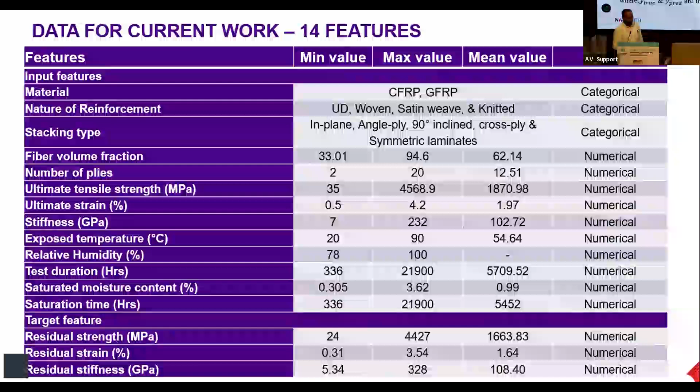R-squared, MAE or mean absolute error, median absolute error, and root mean square error are the general statistical terms we use to quantify the result or outcome of our machine learning model.

One thing we have to make sure is that the data we're using in a machine learning model should be present in at least 10%, more than 10%, of the rows of the data. Unless that happens, the machine learning model won't be able to capture the relationship between those important input features. Once we've decided what data we have and what we want our model to do, then comes the selection of model.

For selection of model: if it's structured data, we go with a machine learning model; but if you have images, sound, thermographic images, or resin flow images to learn about the quality of the composite, we can go for a deep learning model.

Unlike a conventional computer program, we don't need to write an ML model from scratch. Luckily, most of these models are easily available in the public domain, and you can download them from the internet and start working with the model itself. Choosing and training a model involves three steps: training, validation, and testing, and then comparing the models to see whether one worked better than another.

But remember one thing, no one model is perfect. Your step is to apply, use all the models, test all the models, and then come up with a solution that is working great for this particular kind of data.

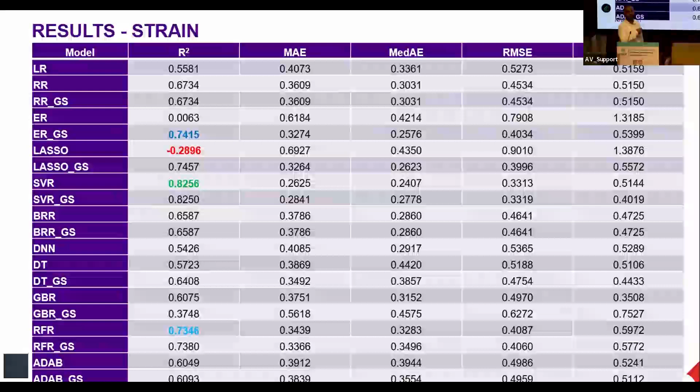Because we are trying to predict something and you will be preparing your own input data. So if new data is suddenly given to it, whether it will be able to generalize the learning it has attained over training. So this result can be associated.

So once hyper tuning is applied, different models tune their inputs and train themselves differently. Actually I'll share all these slides with Singh sir, and I have the manuscript also, which you can go through, and you will find that each model treats different input parameters differently. And they have a number of hyperparameters which need to be tuned in order to get the right result. These are the results from the best model, each model giving us the best output, right?

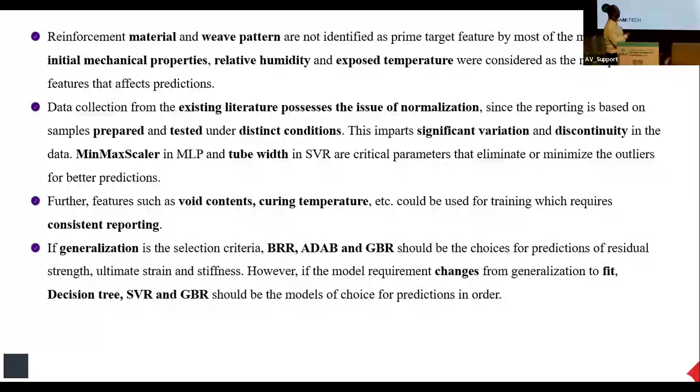But when the requirement changes from generalizability to fit, then decision tree, support vector regression, and GBR or gradient boost regression are the models that you should go for, provided you are fixing residual stiffness as the suitable predictor.

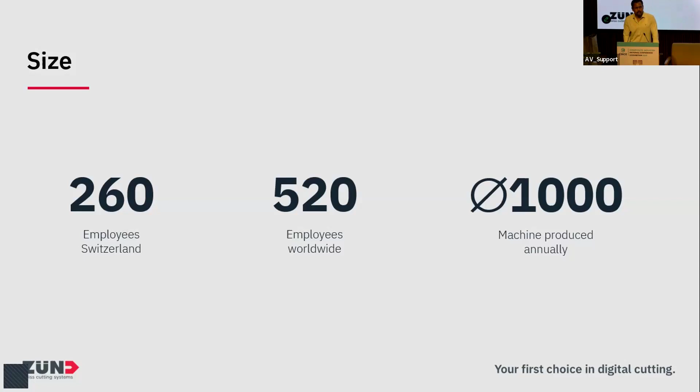In Switzerland, we are about 260 odd employees, but globally we are a little over 520 employees, producing about 1,000 odd machines. A little insight into our operations globally: we are 14 companies outside of Switzerland with an additional 60 sales partners. We have a little over 300 trained and certified technicians to handle our after-sales processes.

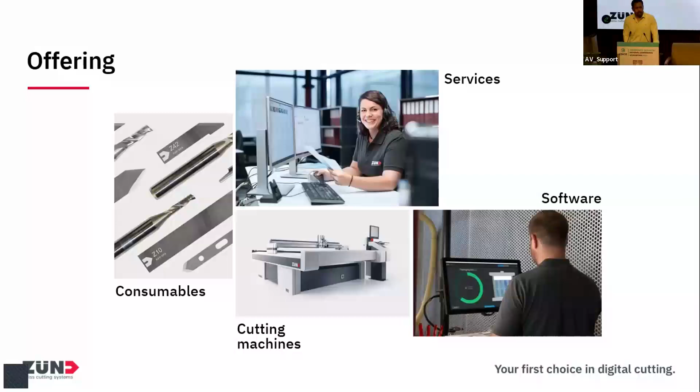So in addition to the cutting solution, the digital cutting machine itself, we also offer relevant software services, which go hand in hand with our hardware services. We also have our in-house spare parts and consumables support partners in Switzerland. And in addition to these, we also offer pre-sales and post-sale services. Over 15,000 customers globally, spread across 100 countries, and over 25,000 installations in various different industry segments.

Sustainability is the core of Zund. It even translates into our machinery. We talk about a machine life of, let's say, 15 to 20 years at least. So coming back to the composite market itself, what kind of solution do we offer to the composite market?

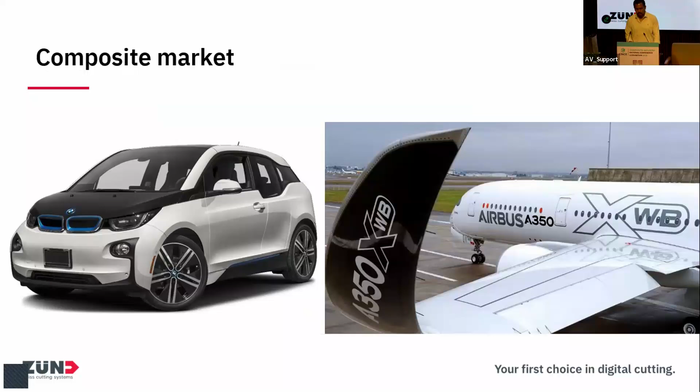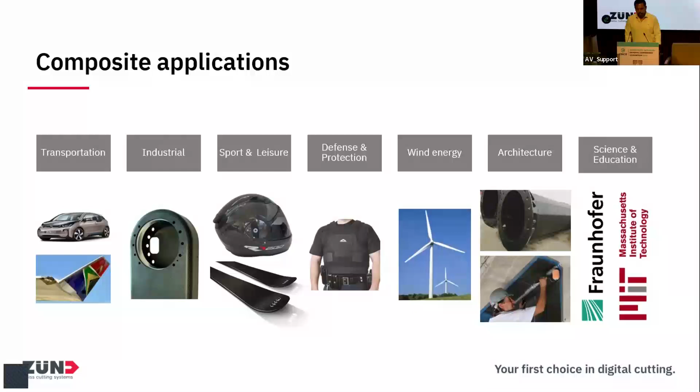So the composite market per se is diverse in its existence. It's not only focused on one particular segment. We have transportation, but the use of composites is not limited to that. We have industrial components being made. It's used in sports and leisure. Defense and protection also, for making bulletproof jackets and things like that. Wind energy is a big segment again. Architecture is catching up. Not so much in India, but I heard from the earlier presentations that it is slowly creeping in. Science and education, obviously.

So what are the substrates that we can actually apply our solutions to? It's not only limited to composite carbon or glass fiber fabrics, but also prepregs, unidirectional tapes, core materials which are used in aerospace and defense, even cured components of GFRP and CFRP, auxiliary materials for sure, thermoplastics, hard foams, and also sandwich materials.

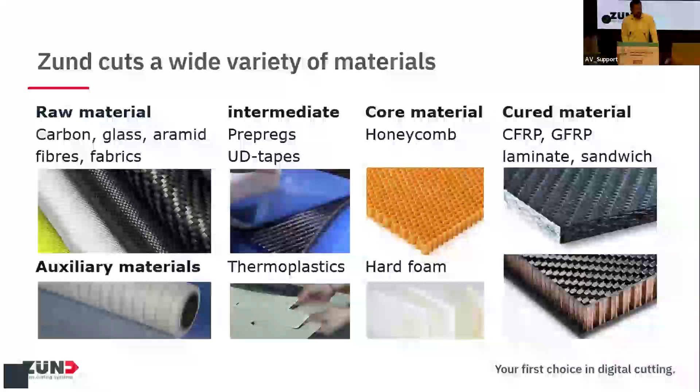We also have various workflows for handling the substrates, right from carbon, glass, and aramid fabrics. We can cut and mark prepregs as well, cutting and routing thermoplastics, cutting and routing core materials, routing of fiber reinforced plastics, and we can offer fully automated cutting, sorting and kitting solutions to the industry. Let me just quickly show you a small video so that you'll get more insights into this.

So that's the screen on the machine itself. The cut components are sourced from your AutoCAD or CATIA in the form of vector files, could be DXF, could be PDF. We have an elaborate material library. So in order to save material, we have a full-fledged nesting program, which we can offer along with the machine. A little bit of editing is also possible on the machine itself.

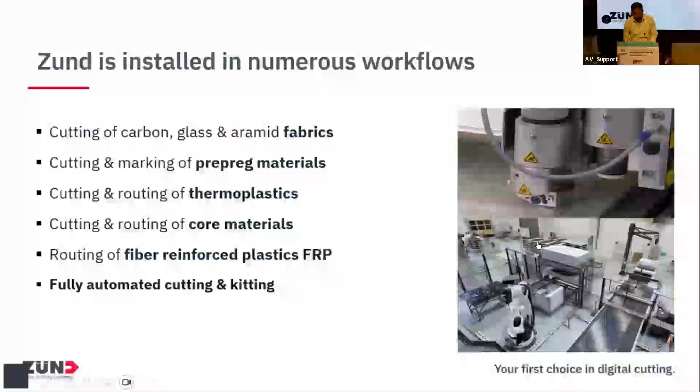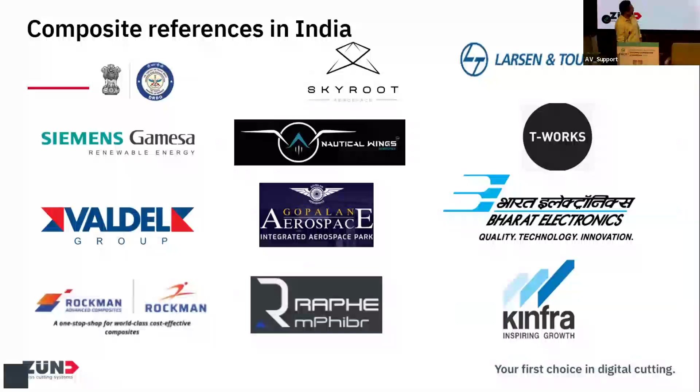That was a short presentation from Zund. We are here just outside this hall. If you have any questions or clarifications, I'm here today and tomorrow as well, so please visit us.

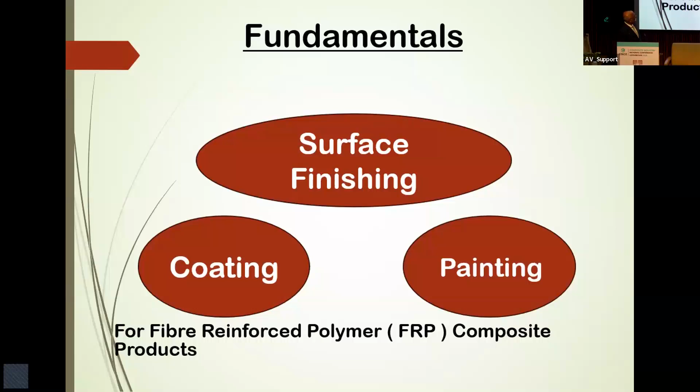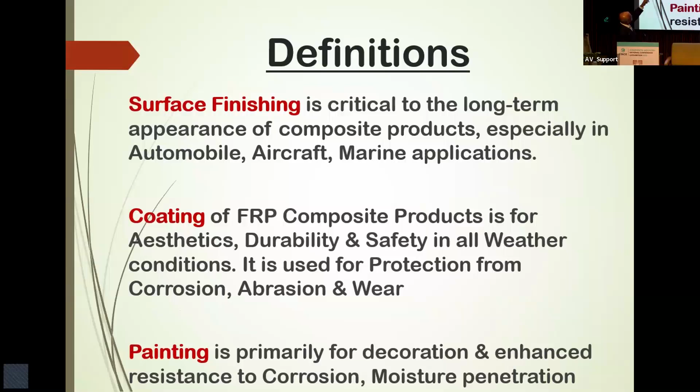Surface finishing is critical to the long-term appearance of composite products. Coating is also for aesthetics and durability, and painting is primarily for decoration and enhanced resistance. These are all post-operation processes.

There is a misnomer in this industry. We call FRP fiber reinforced plastics, which is a wrong word. Plastics is a wrong word to use for FRP; it is fiber reinforced polymers. When you say plastics, the general public, if you take an auto in Ahmedabad and see the mudguard cracked, and ask the driver what happened, he will say 'fiber is up.' Fiber is a misnomer. We are into fiber reinforced polymers, and it has to have a good finish. Quality surface finish is not optional, it is compulsory if you want to be in the market for the long term.

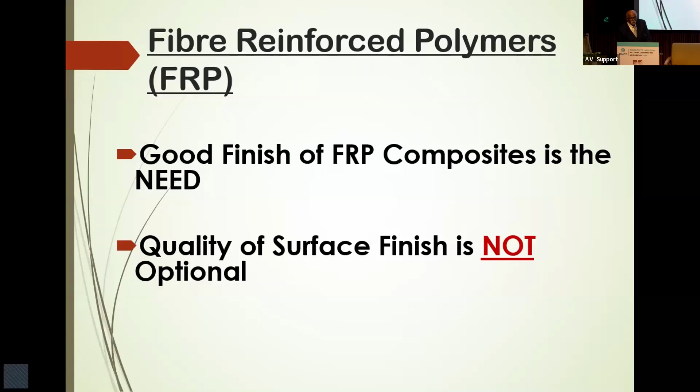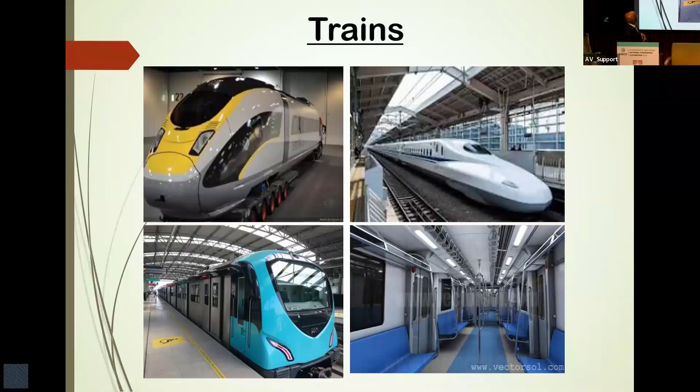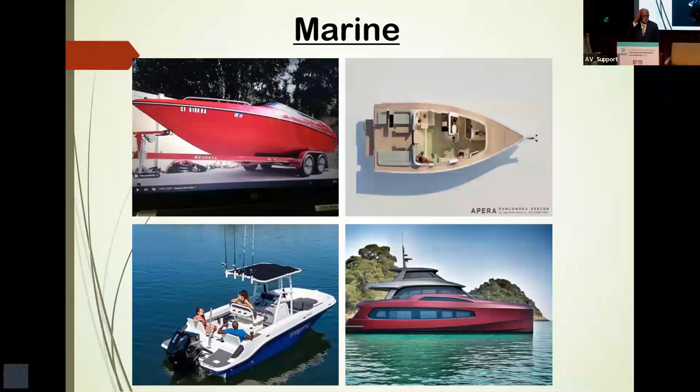Marine applications. In our industry, we say class A finish. Class A finish means it is like a mirror. If you look at this boat, a man with good hair can comb his hair looking at it. That is what is called class A finish. See, that is also a class A finish, but it is matte finish. The importance of finish here is when the boat is gliding through water, it has to have no resistance. It has to go smoothly, so finishing is very important in this application.

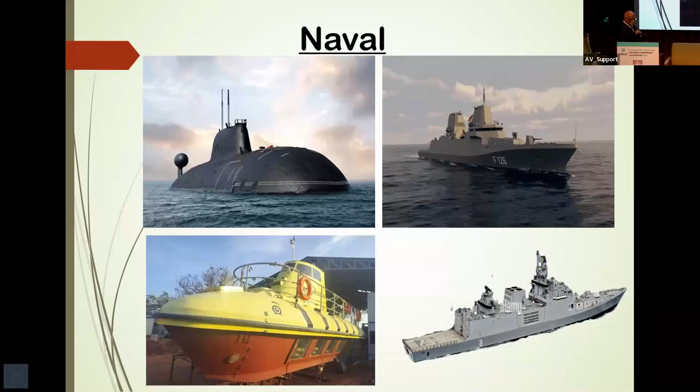Now naval applications. I'm doing some work with defense authorities on submarines, frigates, and stealth naval vehicles. These have a different requirement, not class A finish, but they need good abrasion resistance and resistance to salt water. These are all made with special resins by hand layup or automated systems. Now this is a stealth naval craft, you see a lot of layers of glass fiber being used in this.

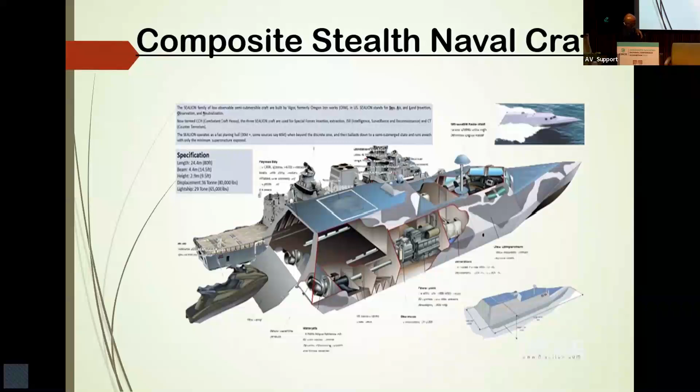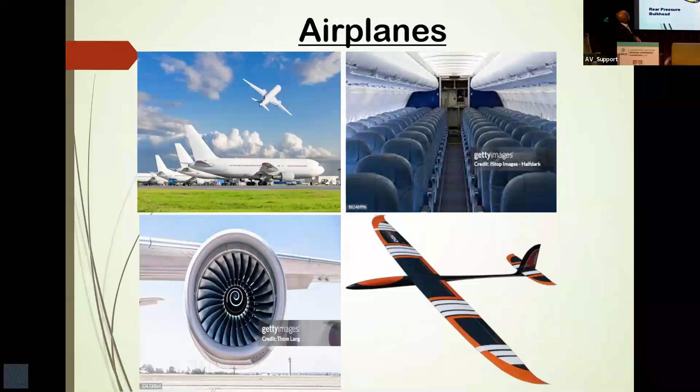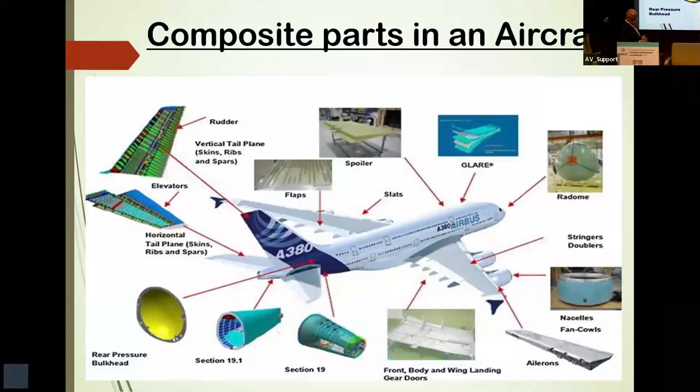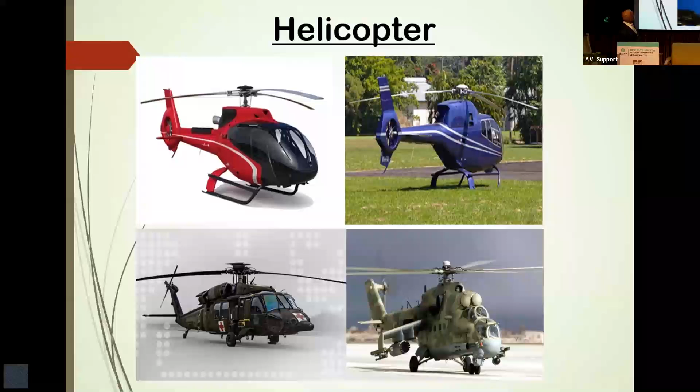Now helicopters, this is a recent development and there's a big scope in India for industrialists to get into this business. This is a normal helicopter used by industrialists in India. This is army, that is a high altitude helicopter. Now drones are everywhere, this is going to be at least 30% of the aerospace application in India in future. So any student interested in developing a new product, this is the business to be in, because older people will not venture into this. You young people with fresh thoughts and who are computer conversant can do these jobs.

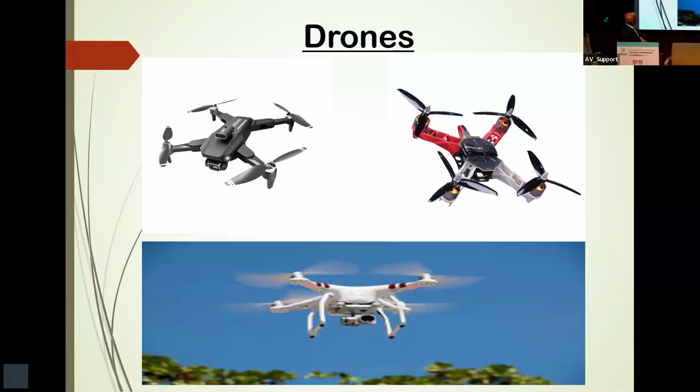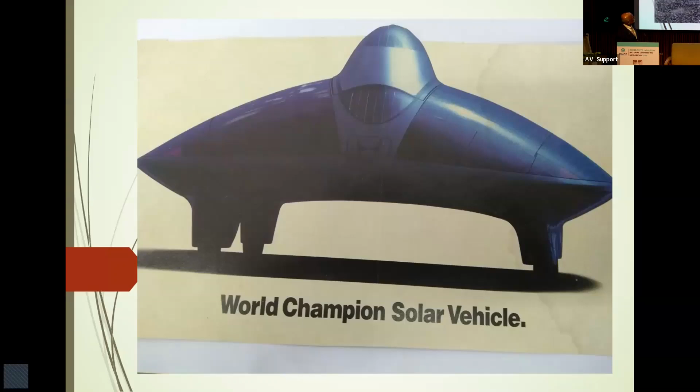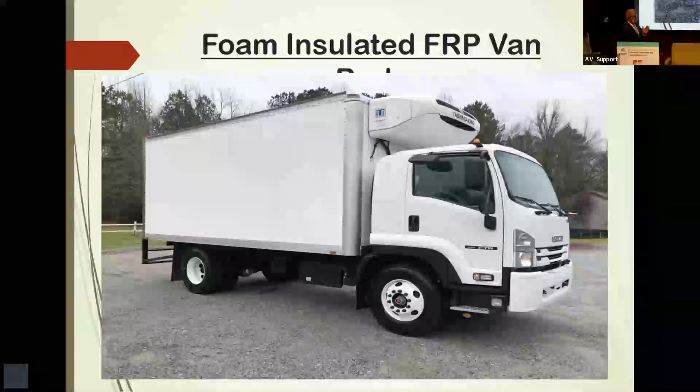Now, foam insulated FRP van, this is for refrigerated vehicles. This has got a sandwich of polyurethane foam or phenolic foam, depending on the application. This is also a good product to get into.

Now, motorcycle parts, there are many. That's a normal helmet, this is a military helmet, made of basalt, the lower one.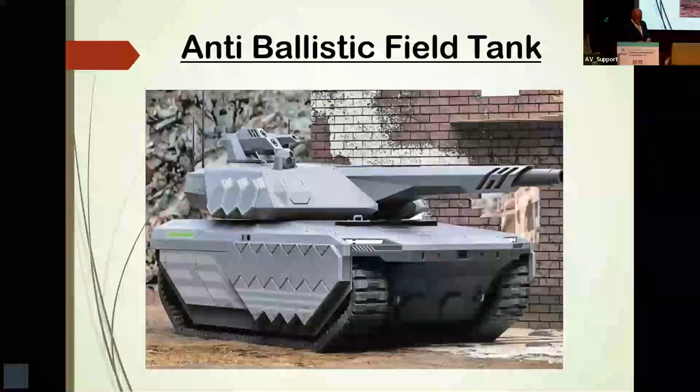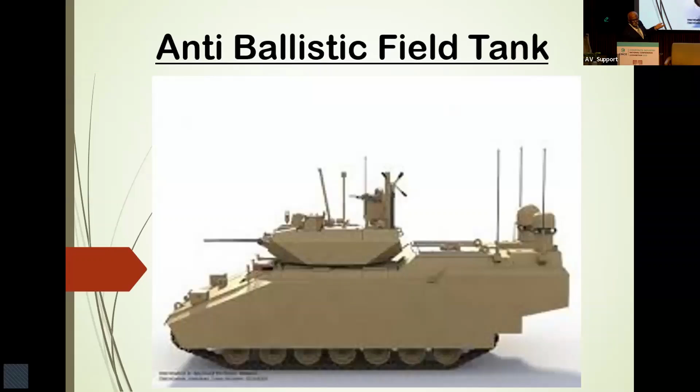This is another anti-ballistic field tank, made completely of basalt with phenolic. This will come to the Indian Army maybe in a couple of years.

This is an anti-ballistic application where there is a sandwich of five materials, including a ceramic plate and aluminum honeycomb. This is the point of contact. If you see the back side of the plate, you see only one impression at the center, otherwise the bullet is stuck inside.

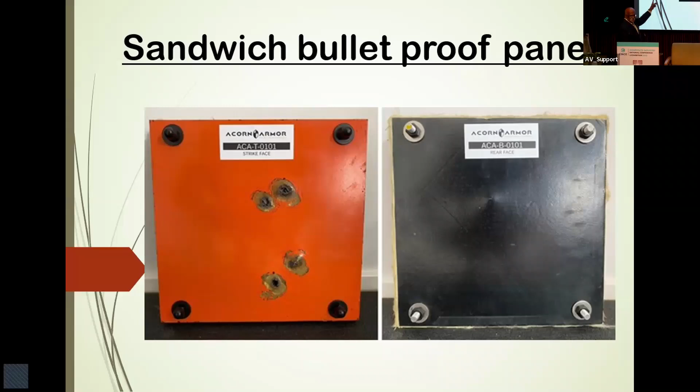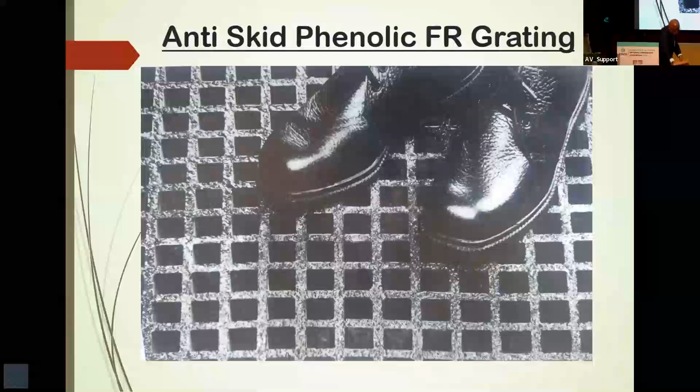Now coming to industrial applications. This is a normal grating, a phenolic grating. It has a rough surface so that in ONGC, the oil industry, it should not slip, otherwise it will go into the sea. Normally sand is used, or a sophisticated material which is available with me, and it is heat resistant also. Phenolic is fire retardant, and the top coating is heat resistant.

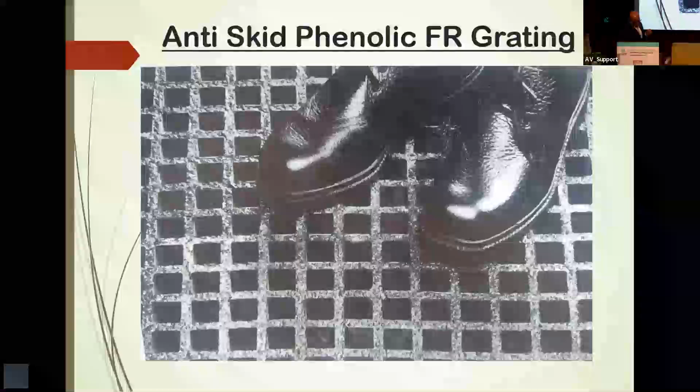Now these are different kinds of carbon fiber laminates.

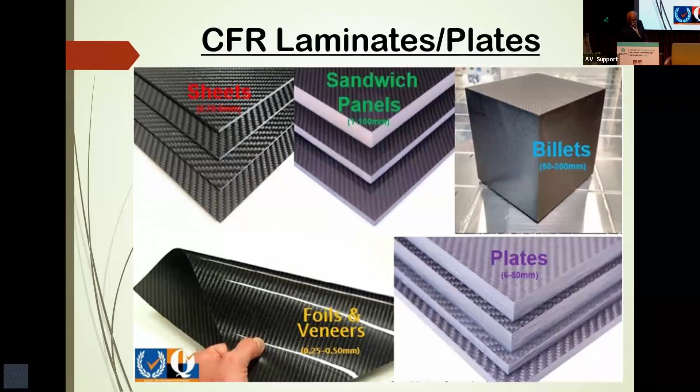Not working. I think I expanded too much.

This is my expertise. This is a house with a cladding of phenolics, a fire retardant panel, completely fire retardant structure. If you see the joint, because we cannot make such a big piece in one mold, it has been joined again by phenolics only. There's phenolic adhesive, not epoxy or polyurethane adhesive, phenolic adhesive. This is in Malaysia.

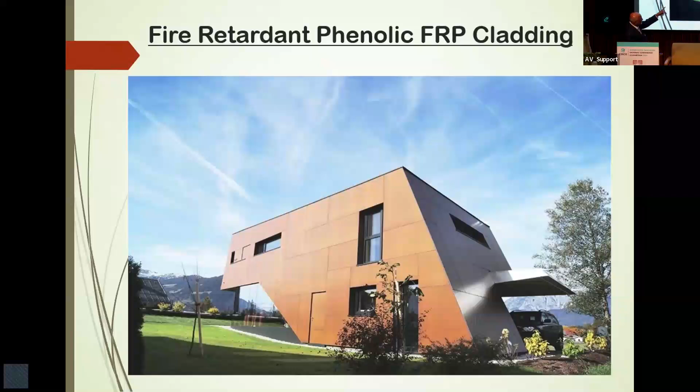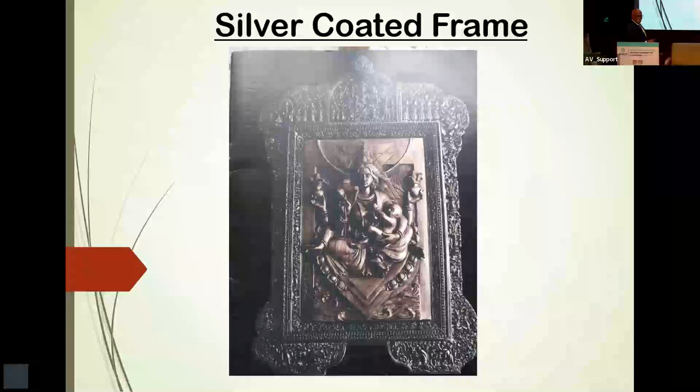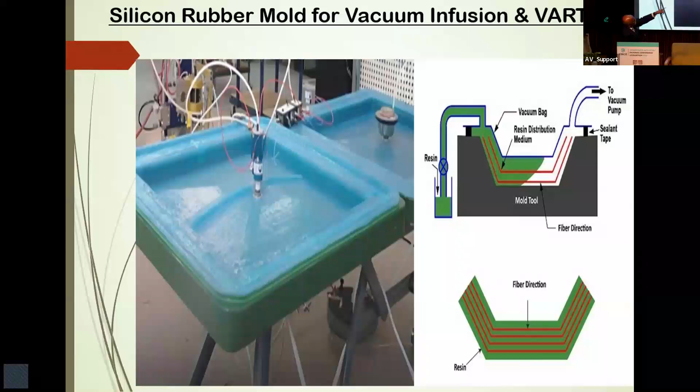So I'm going to the process. This is vacuum infusion by silicon rubber, that is again VA RTM, vacuum assisted RTM, where you can get double finish also if you want.

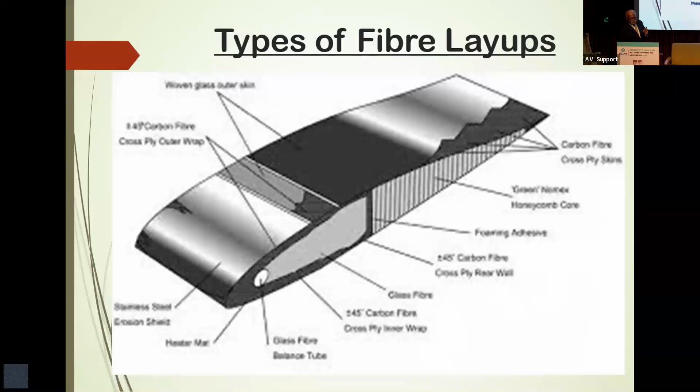This is a helicopter rotor blade. This is a very unique product, it not only has to take a vertical load, it has to take the twist also. The shape of this is called aerofoil. It is very, very difficult to make, and making a mold for this took around 1 month.

Now, we also have honeycomb core panels to make it more lightweight, like the helicopter body is made out of honeycomb panels with FRP or carbon fiber.

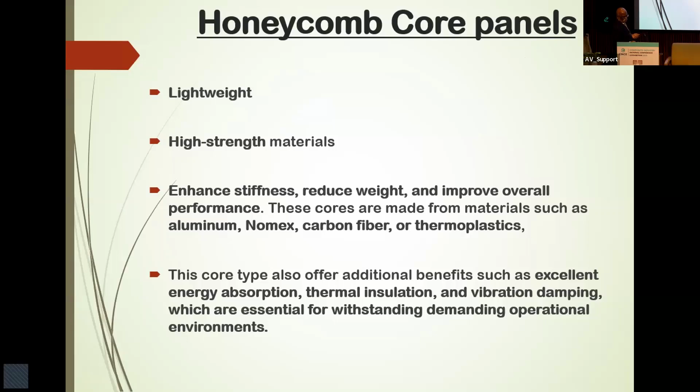I have a good video, but I have signed an NDA with the defense authorities. All of you must have seen the James Bond movie where Roger Moore drives a car and it falls into a river and goes through the water also. So now the latest product used for spying is a vehicle that has to move on the road, go as a boat in the water, and go underwater like a submarine. That is a spy vehicle which I have been involved in developing. This could go for the Indian Army maybe in 5 years.

It can be made of wood or cut from foam, and then finished in such a way that when we take out a mold, it has to be a mirror finish. So we have a release agent which I have developed through a German company, and it will come in the market soon. The mold can be of silicon rubber or as it is. A new mold, you have to wax it 6 times and apply release agent 7 times, then only you get a good finish. A mold has to be of a dark color, either red or black, so that by looking at the mold you can say how the product will come out. This standard operating procedure is not followed by a single molder in this country, which is very sad.

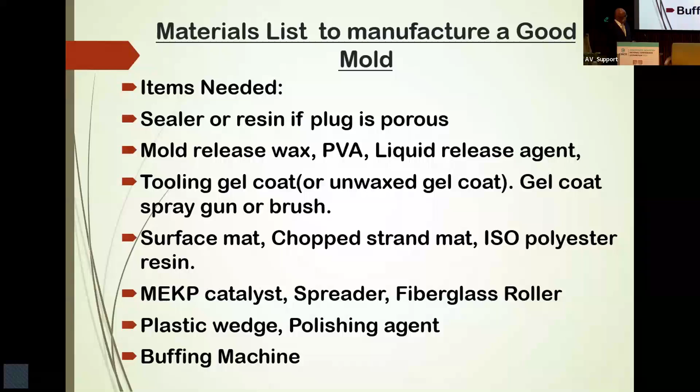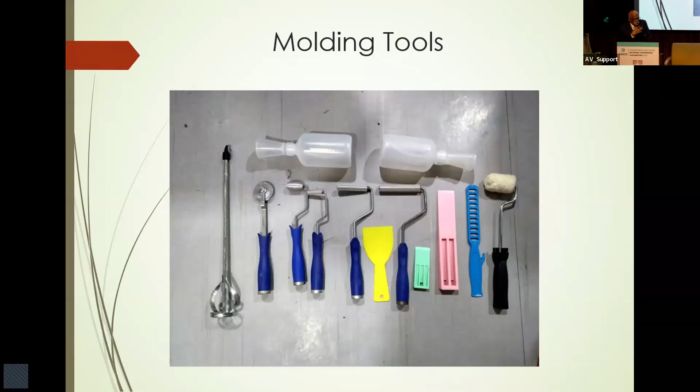The last one is a lamb's wool roller, which 95% of people in India do not use. They are using a normal brush. I am trained in Germany, I don't use a brush, I use only rollers. With a brush you are putting air into the product. With a roller you are removing the air from the product. There should be damage control if you have air in the product. So this is how good molding practice is to be followed.

I give free service to anyone in the industry, I don't charge. So if anyone wants me to train people, I train a lot of people in the Middle East, Saudi, and Singapore. I am a certifier, if I certify this guy is a good guy, you get a good job and a fantastic salary. So anyone, even universities, if they want my services, I'm ready to come and teach how to make a good product. Thank you.